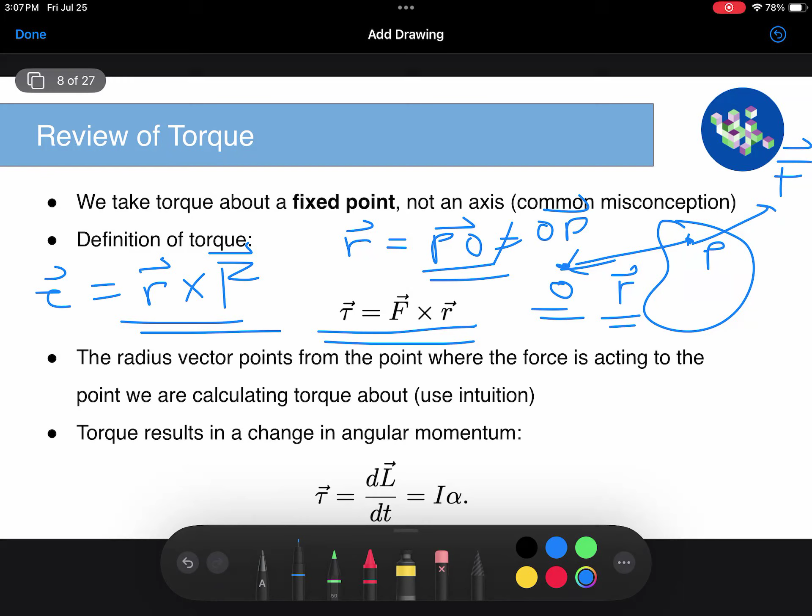Are these two equivalent? In a way, yes, and in a way, no. They both are supposed to mean the same thing. What is different between these two definitions is the definition of the radius vector. You'll use this definition if R equals OP, but you'll use this other one if R equals PO. So how do I really memorize that?

Well, think about it this way. So if I have a disk, and let's say it's three-dimensional, let me clear the board up a bit so it'll be easier to see.

All right, so let me draw in red. If you have a disk over here, this is our disk, and this is our rotational axis. And it's going to be rotating, say, in that direction. So if you look from the top, it's rotating counterclockwise.

Now if my force points, say I apply a force in that direction to the right, that's my force. Now torque is like dL/dt, which is like I times alpha. If you're applying a force in that direction, you're causing an angular acceleration that points in the upward direction. Basically that force is making the disc rotate in that direction, making it rotate counterclockwise.

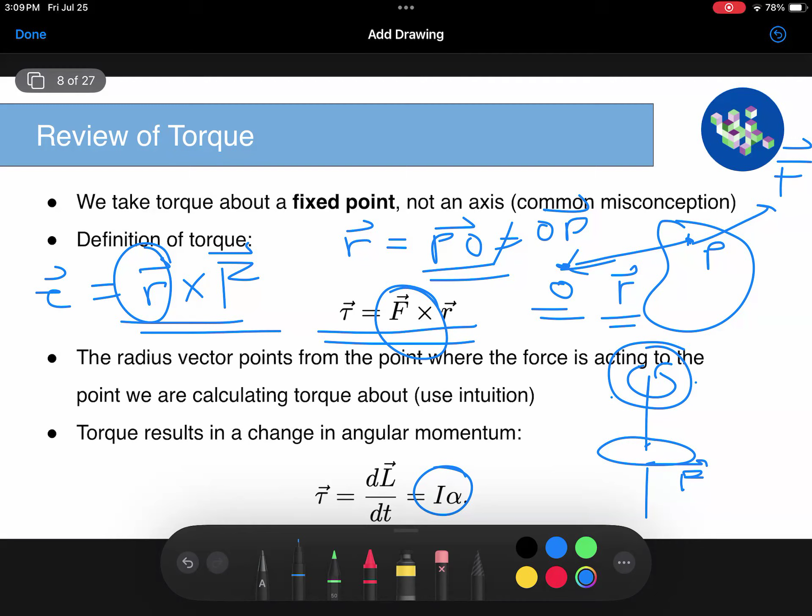And if you remember, if you want to find the direction using cross products, you use the right-hand rule. You take your fingers, second to fifth fingers, and point them in the direction of the F vector. Well, if we're using this definition, you point your fingers in the direction of the F vector. In this case it's pointing to the right. And then I want to curl my fingers in the direction of the R vector.

Someone tell me what the R vector is in this case. Nirvair, can you tell me, or can you draw on the board where the R vector is when I'm doing F cross R?

Isn't it pointing upwards? Wait, can you draw on the board? I don't know how, sorry. Wait, do you see on your bottom left corner of the screen, is there like a little green pencil? No. Oh, okay, that's all right. Well, oh, you guys can't draw. Yeah, I don't really see any setting to let you guys draw, but all right.

Basically, we want the cross product to point in this direction, we want this to be our F cross R, the upwards direction. So if we know that F is towards the right, what direction do we want the R vector to be? Remember, for the right-hand rule, yeah, towards the middle.

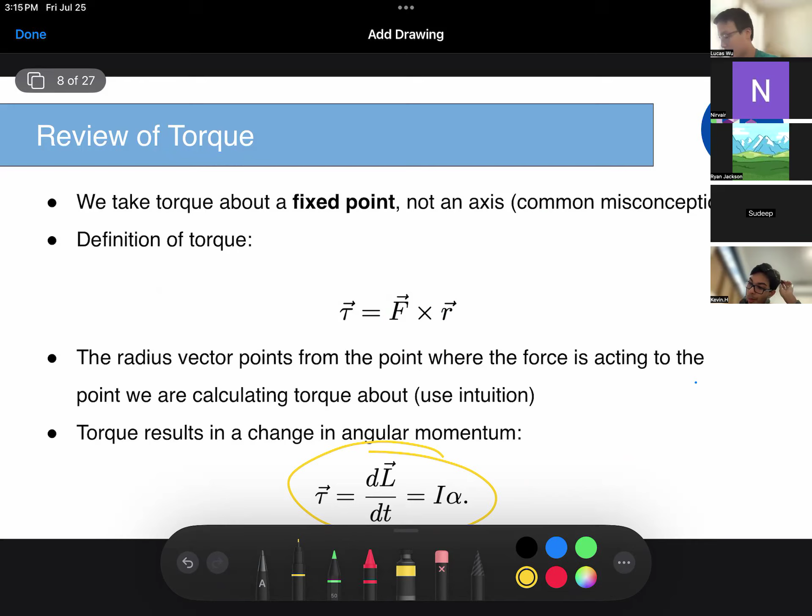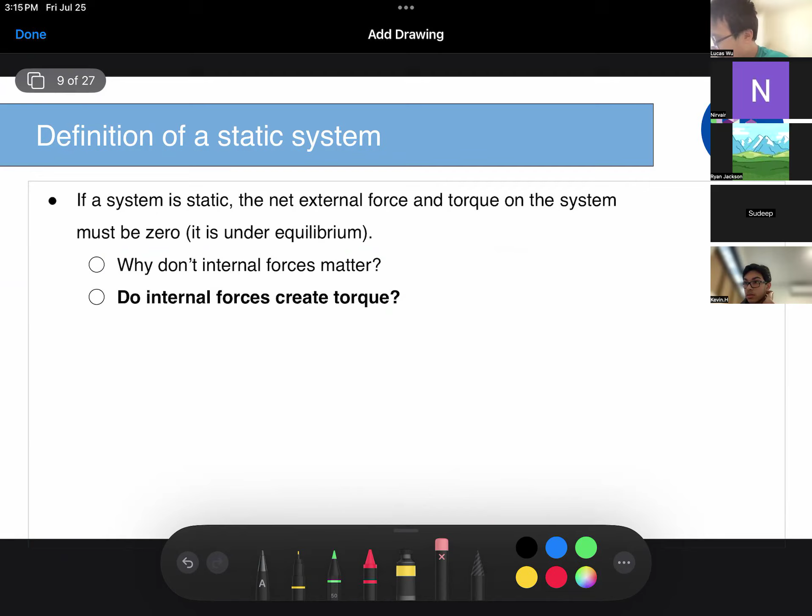So you'll be fine for this week. Let's go on to the next slide. Definition of a static system. If a system is static, the net external force and torque on the system must be zero, so it's under equilibrium. So if I translate this into mathematical terms, for the net external force to be equal to zero, what that means is if I'm summing all of the forces, the vector sum of all the forces must equal zero. And the net torque on the system must be equal to zero.

So that's just doing this sigma of Fi crosses the Ri. And remember, Ri is the radius vector from the point the force acts to the point you're taking the torque about. And the point you're taking the torque about, or that fixed point, you can choose any point in space to do the torque about. It doesn't really matter which point you do it about.

For the system to be static, this must be equal to zero. We'll see later that it doesn't matter which point you're taking the torque about. If you have a static system, it wouldn't matter which point you're taking the torque about - it would always be equal to zero. We'll show a proof of that later, but for now, just remember: system is static, net external force and torque on the system is equal to zero.

Now here's a question for you guys. Why don't internal forces matter? You might have heard of the terms external and internal forces. For example, if you have a block, and a massless string, and there's an external force pulling that string. The external forces on this: gravity downward, a normal force upwards, and the force you're pulling with - assuming there's no friction, those are the three external forces. But there are also internal forces.

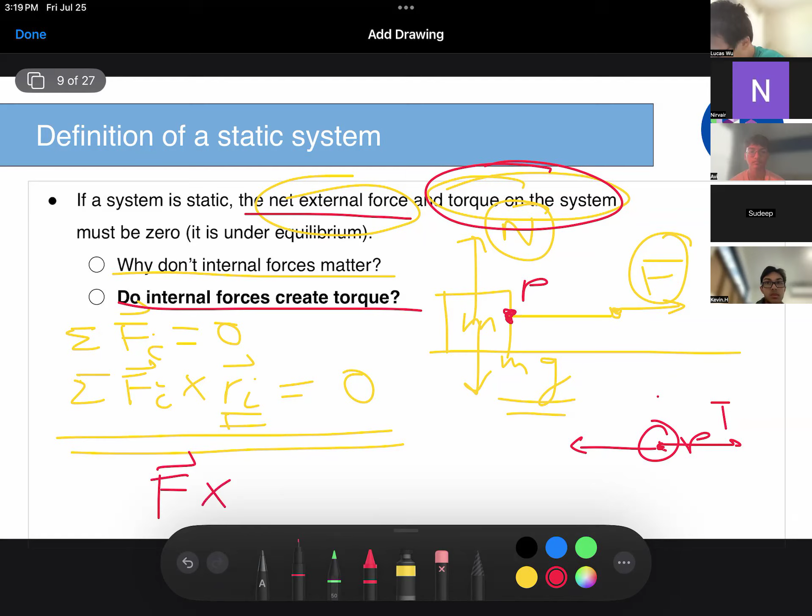That's actually the second question: do internal forces create torque? You guys probably can answer this. We'll assume that if you have two internal forces, they're force pairs acting at the same point. So what we're doing is F crossed with some radius vector, and F crossed with the same radius vector - that's just equal to zero. So internal forces create no torque - the answer is no. The net external force is the same as saying the net external and net internal force, because the net internal force is always equal to zero.

So just remember that if a system is static, net external force and torque on the system must be zero. Do you guys have any questions on that? Nope. All right, let's go on.

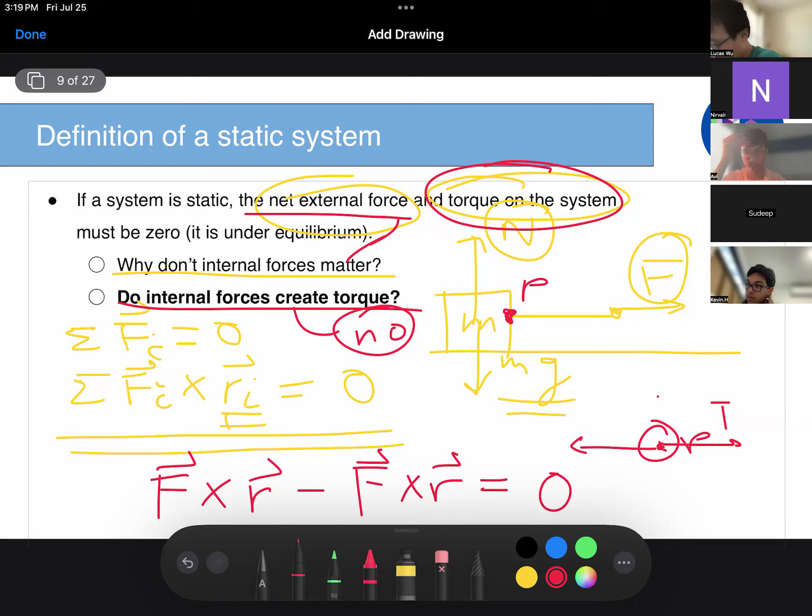Let's talk about the bending moment - some people call it that. Essentially, we need to prove that given the net force on the system is zero, if the torque about a single point is zero, then the torque about any point is zero. Let me give you guys a minute to think about this. If you have an idea or an answer, message me in the chat and I'll tell you if it's right or wrong - it's probably right, but we'll go over this in a minute.

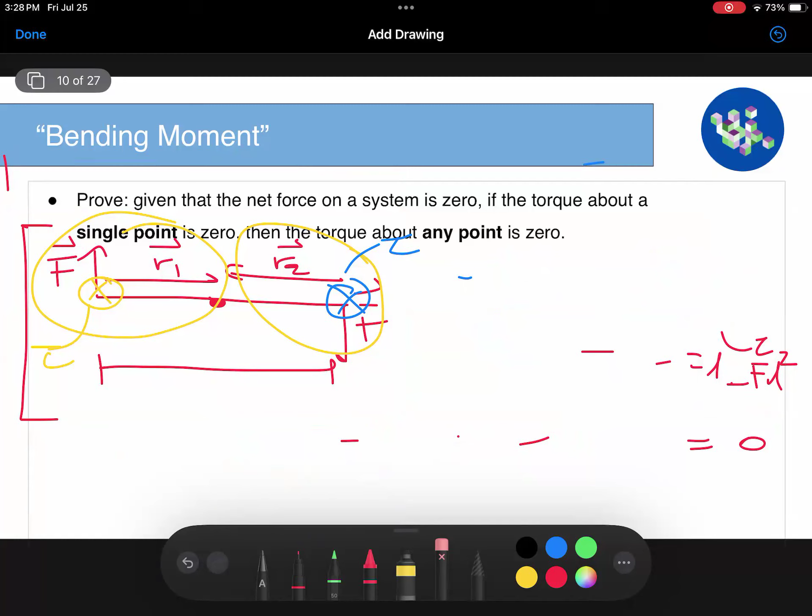All right, okay, so let's go on to prove: given that the net force on the system is 0, and the torque about a single point is 0, then the torque about any point is 0.

I remember someone had a pretty good explanation about it. Avi, can you give us your explanation, your proof of it?

Okay, so basically what I did was that, like, if the torque about one point is zero, and let's say the object is rotating or doing whatever, it's just going to stay however it's rotating by Newton's first law, like Newton's first angular law. And then by that logic, since the state of rotation is not changing, that means if you try to take the torque about any point, you're still going to get zero because the angular acceleration is zero.

Yeah, I like that. So you're using the fact that torque equals moment of inertia times angular acceleration. You know the torque about some point is zero, so your angular acceleration is zero. Then the torque about any point must also be zero, because the angular acceleration is independent of whatever point you're taking the torque about, right?

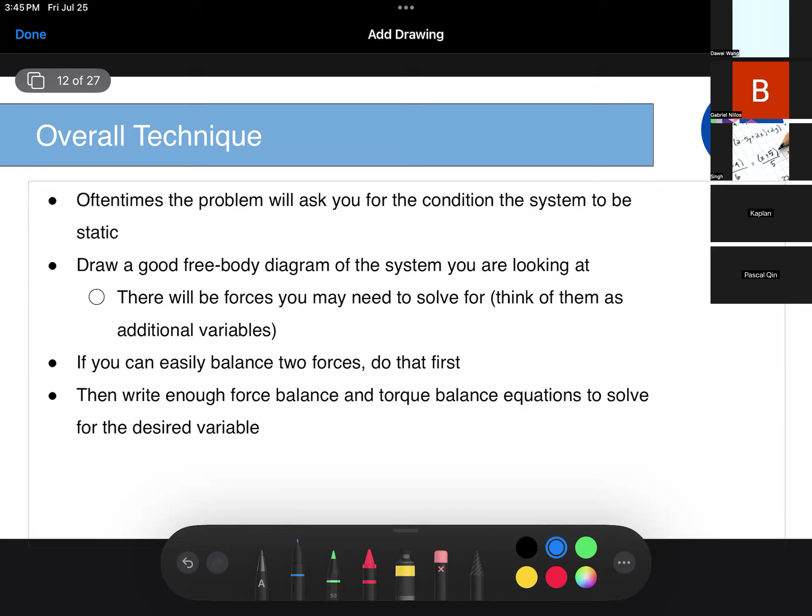Oftentimes the problem will ask you for the condition for the system to be static. First, draw a good free body diagram of the system you're looking at. There might be forces needed to solve for, think of them as variables. If you can easily balance two forces, do that first, and write enough force balance and torque balance equations to solve for the variables. You can read this, but you don't have to memorize it. You'll acquire it through technique. That's why I'm going through it so fast. Once we start this next problem, you'll get a better idea.

Just a few tricks: use your intuition, don't solve for every force, do some sanity checks. It's helpful to take torque about a point that many forces act upon. But these are just techniques, don't memorize them. Once we do the next problem, you'll get a better idea and acquire better intuition when doing more statics problems.

So let's do this one together since it's probably the first problem we're doing together. A ladder leans against a frictionless wall. If the coefficient of friction with the ground is mu, what is the smallest angle the ladder can make with the ground and not slip? Let's draw a picture and a good free body diagram.

That's our wall and that's the ground. Let's say that is the ladder. What's the smallest angle the ladder can make with the ground? Let's call this angle theta. Let's say we're given that there's friction with the ground, so we're given mu, the mass of the ladder, and the length of the ladder, which is L. Now let's draw a free body diagram. How about someone tell me what the forces on the rod will be?

Friction, normal, and gravity. Good job.

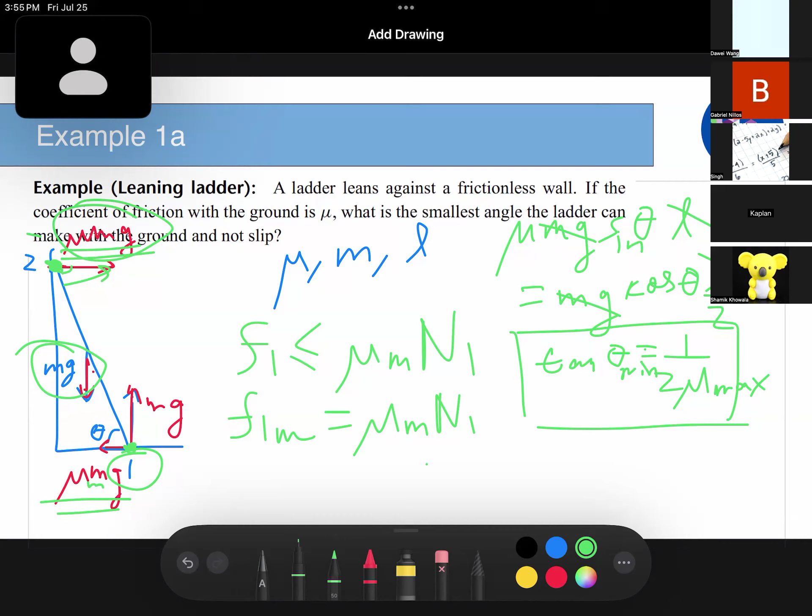Wait, why do you label the coefficient max? Oh yeah, remember that friction force? This is a static situation. Remember, if you have static friction, your friction force is always less than or equal to the maximum mu times the normal force. Remember that?

I thought the maximum was just mu n. Yeah, you can call that mu, sure, it's the same thing. But the friction force, yeah, I get what you're saying. So it's always less than or equal to mu n. I guess we can erase that. The friction force in a static situation is less than or equal to the maximum static friction times the normal force, right?

And from that, we get the condition for the minimal angle with the ground. Any other questions? Or if not, let me ask you a follow-up question. What if I didn't want to find the minimal angle with the ground, but just wanted the condition for the angle with the ground so that the stick does not slip?

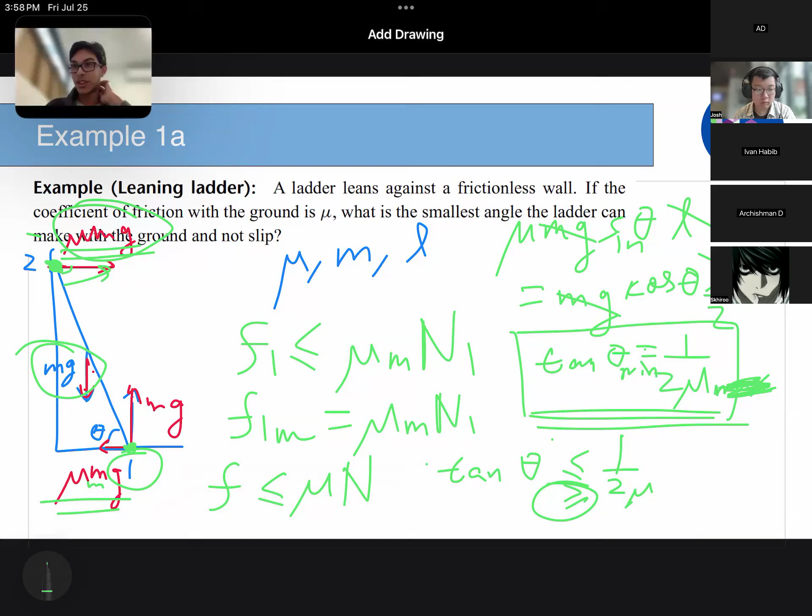Yeah, I get intuitively why the smaller the angle, the more it'll slip, but is there an actual physical reason why that's the case? I was thinking it was something to do with the torque, but I have no clue.

No, that's good. So if we look back over here, this equation was balancing the torques. The thing that makes the ladder slip is due to gravity. If we look at this, the torque due to gravity is mg cosine theta times L over 2. The smaller the angle with the ground, the greater cosine theta is, and the greater cosine theta is, the greater mu you need to balance the torque due to gravity.

So yes, you have the intuitive explanation, and this is the algebraic explanation: cosine theta increases as theta decreases. So as the angle with the ground decreases, there's a greater torque created by gravity that needs to be balanced by the friction force. Does that make sense? I like how you're asking for the algebraic way. Yeah, that made sense. I like those questions. Any other questions?

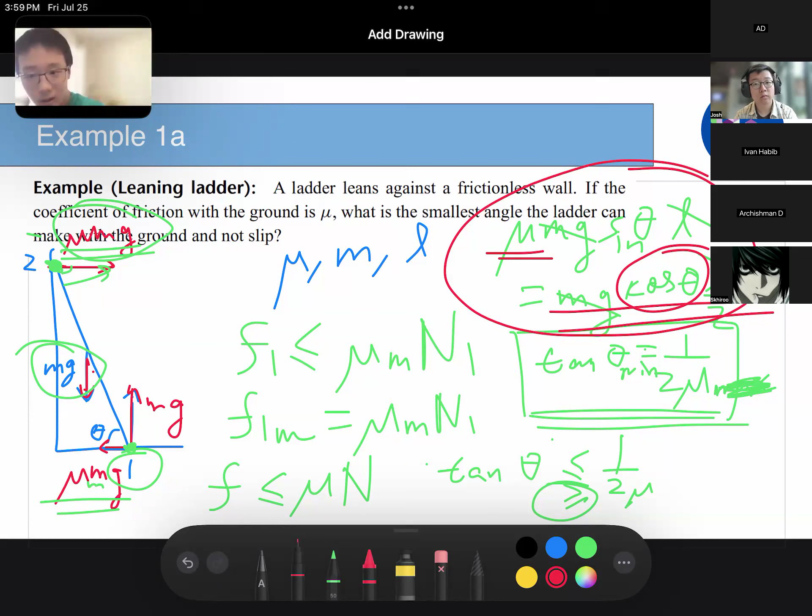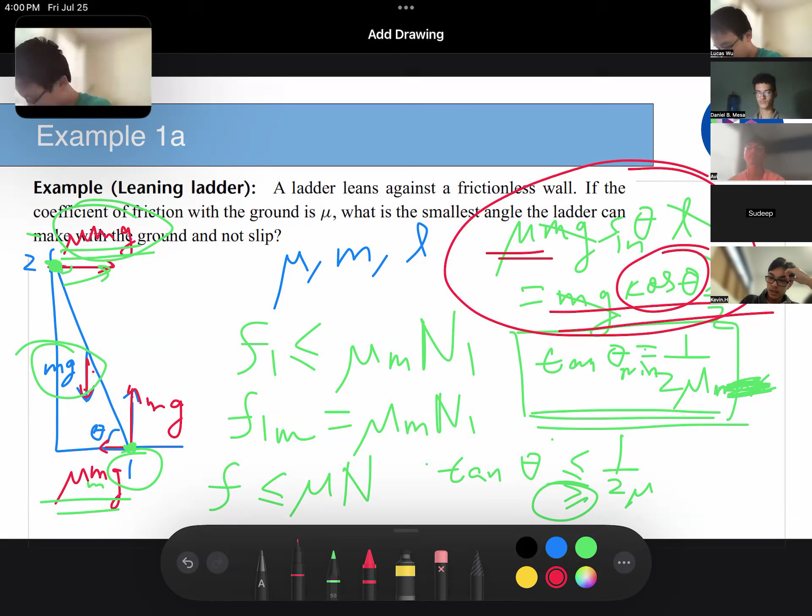Let me see. All right, I don't think there are any other questions, so let's go on. Oh, we're running low on time. That's not good. All right.

Here's an idea: if forces are applied to 3 points in a static system, then the extensions of the vectors representing the net force at each of the 3 points must be concurrent or parallel. We want a proof for this.

For the sake of time, I'll just go over the proof. So essentially, what are we saying? If we have a static system, for example, this, and then maybe this is one force, and then we might have another force over here, and then another force maybe pointing in this direction, like this.

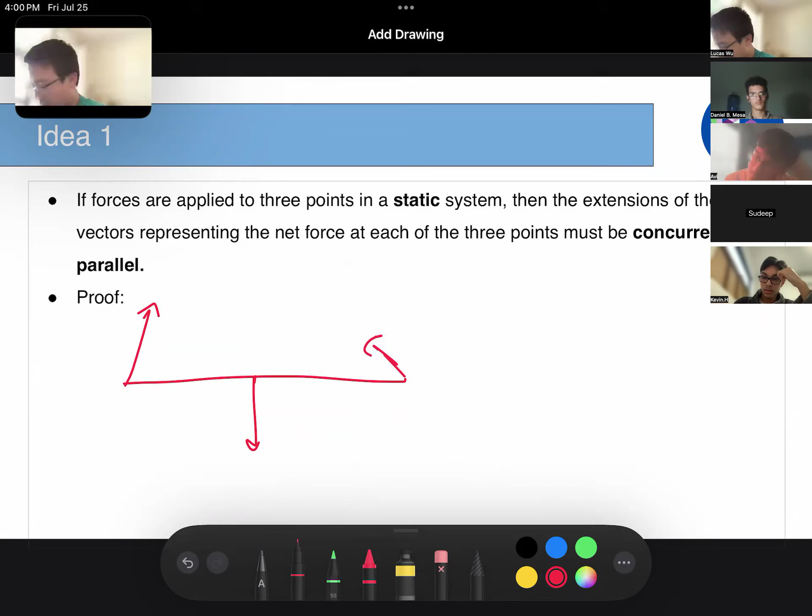Now, what it's saying is that if I draw the extensions of all these forces — we're first given that there's force balance, so these 3 forces, if I do their vector sum, they equal 0. Now, the theorem is saying that if I draw the extensions of each of these vectors, extend this, extend this, they must all meet at one point for there to be torque balance, basically.

And why is that so? We're given that sigma f equals 0. And then we know it's a static system, so sigma tau is also equal to 0.

Remember when we proved that sigma f was equal to 0 and sigma tau was equal to 0, basically when it was a static situation, it doesn't matter which point you're taking the torque about, the torque about that point has to be equal to 0.

And then if these 3 vectors, or the extensions of these vectors, all meet at this one point over here, let me draw that in blue. Notice that the torque about that point has to be 0. And why is that so?

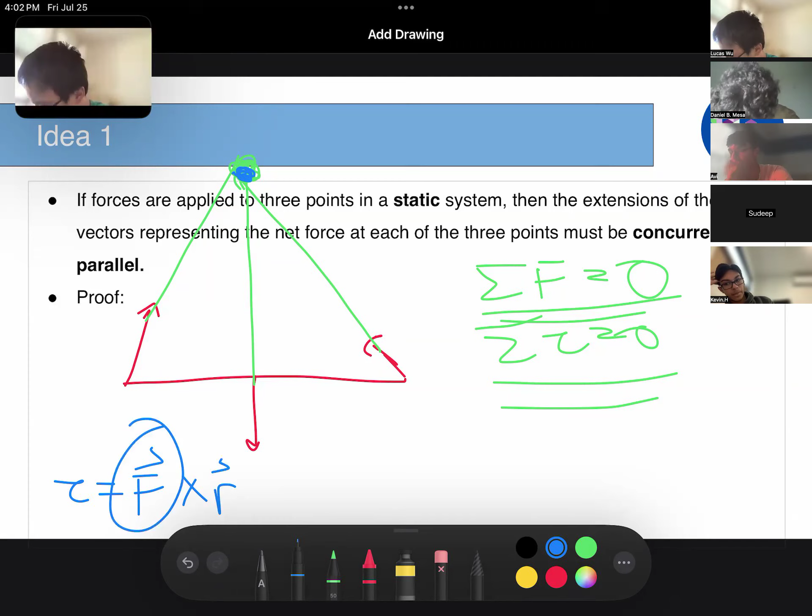Well, remember, torque equals force cross r. Your force here, they're in the direction of r — they're just scaled versions of the radius vector. Because if this is f1 vector, then the r1 vector would be over here, in this direction. This is f2, and this is R2. And so on for R3, F3 and R3.

Remember, here we're doing the cross product between parallel vectors — F and R are parallel here. And if you're doing the cross product between any two parallel vectors, it's always equal to 0. If you remember back in the vector cross product days, it's equal to 0. So this will equal to 0.

And we know that they're concurrent, so if they're concurrent, the torque will equal 0. And because we know the torque about that point is equal to 0, since we also have force balance, then the torque about any point must also equal 0.

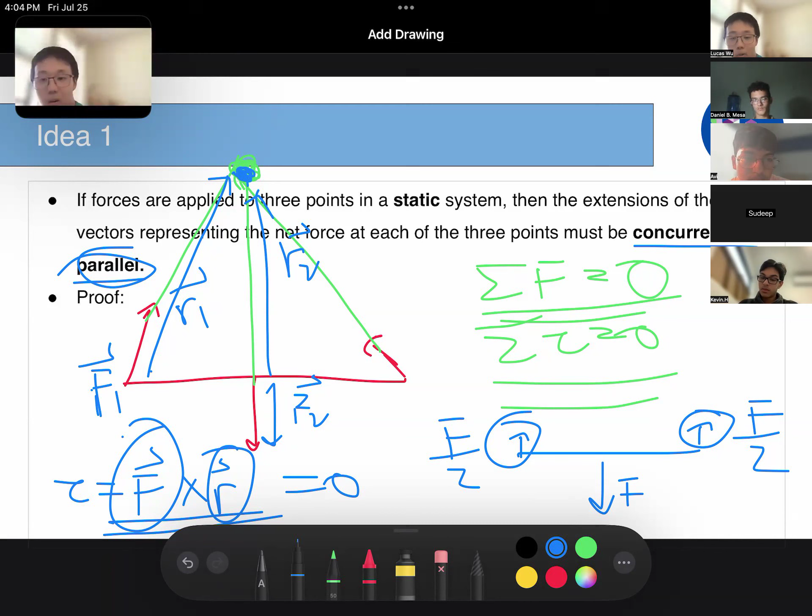Does that make sense to everyone? Any questions about this? All right, okay, let's move on then.

Actually, I'll let you guys think about this for homework. First, basically, if we have forces acting at 2 points, what can we conclude? And also, if we have forces acting on more than 3 points, must the extensions of the net force vectors be concurrent or parallel? Think about that for homework.

But let's go back to this problem, and we'll solve it using the previous idea. Let me draw the diagram again. And if anyone has an idea on how to do this problem, you're welcome to tell me, and then you can lead the way.

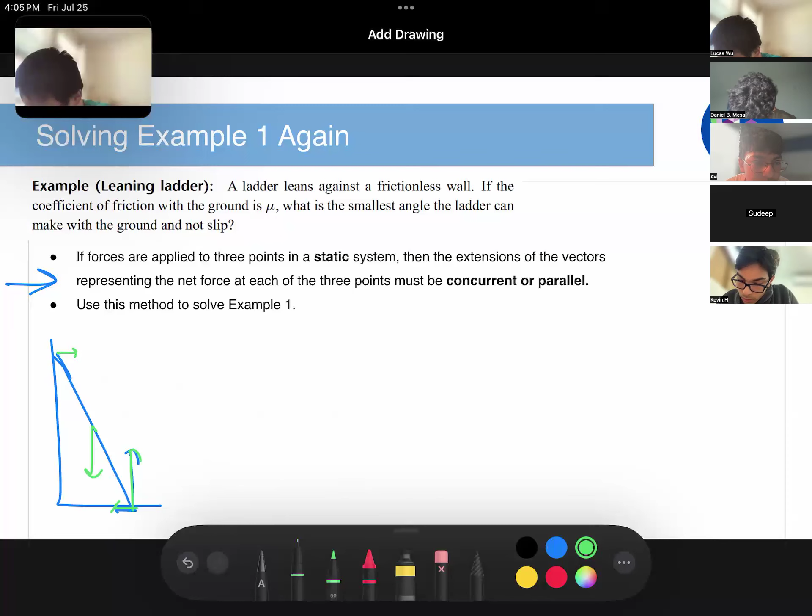So these are our forces, remember? We found that this was gravity. This is normal force. And after a bit of doing the force balance — oh shoot, let me draw this a bit more accurately. So this will be the normal force, this is gravity force, this is normal force, this is friction. So we got this was mg, this was also mg, this is mu mg, and this is also mu mg.

How do we use the idea that there are forces applied to 3 points? Here we have 3 points where the forces are applied: 1 point here, 1 point here, 1 point here. If we have these 3 points where forces are applied, we know that the extensions of the vectors representing the net force at each of the 3 points must be concurrent or parallel.

So what is this saying? We're saying that if we draw this extension, draw this extension, and then look at the net force at this point, doing the sum of the friction force and the normal force, they should all meet up at this one point over here.

How do I use that to solve for the minimal theta over here? Anyone have any ideas? I'll give you guys maybe a minute to think about it.

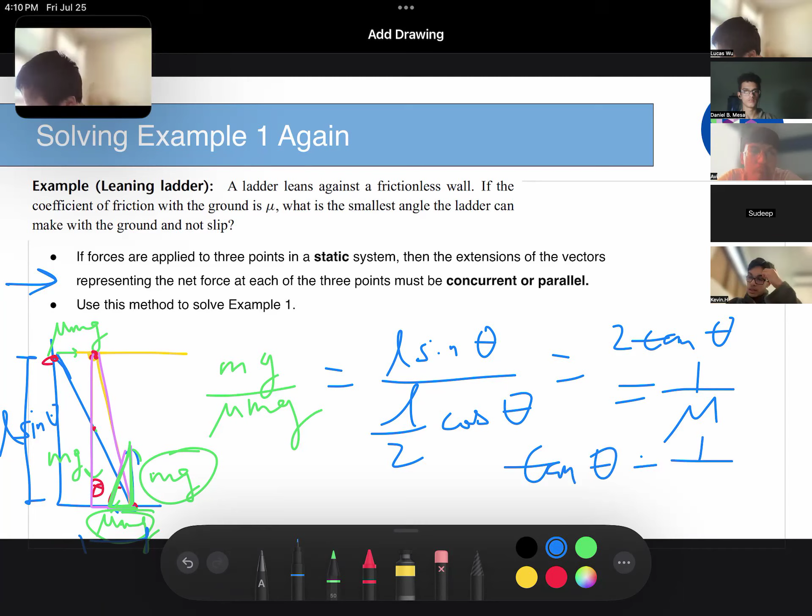Isn't that pretty cool? So we can solve the problem without having to write a torque equation - we're just doing geometry here. We found the similar triangles and proved that those lines have to be concurrent, they have to meet at that point. So this must be true, and you'll end up with tan theta equals 1 over 2 mu as before.

Any questions about that? If you're not really good at the geometry, that's fine, because this is physics, but make sure you have a good idea of what's going on. Any questions about that?

Let me see - just to clarify, what is L? Oh, L is just the length of the ladder. So I'm saying that this length over here, this is the ladder - the length of the ladder must be L.

Yeah, here's another question. For practicing, is the competitive physics book you sent good? Yeah, it's pretty good.

All right, okay, next slide then, I guess. Think about this following problem - maybe it will be for homework. A ladder, so it's the same problem essentially, except this time you still have the normal force, the friction force, gravity force here, and you have the normal force here, N2. But what happens if you also have...

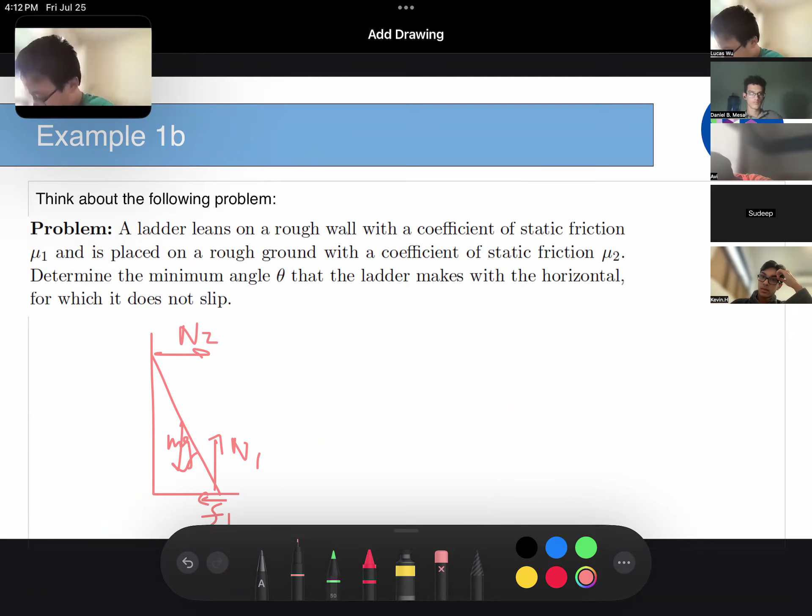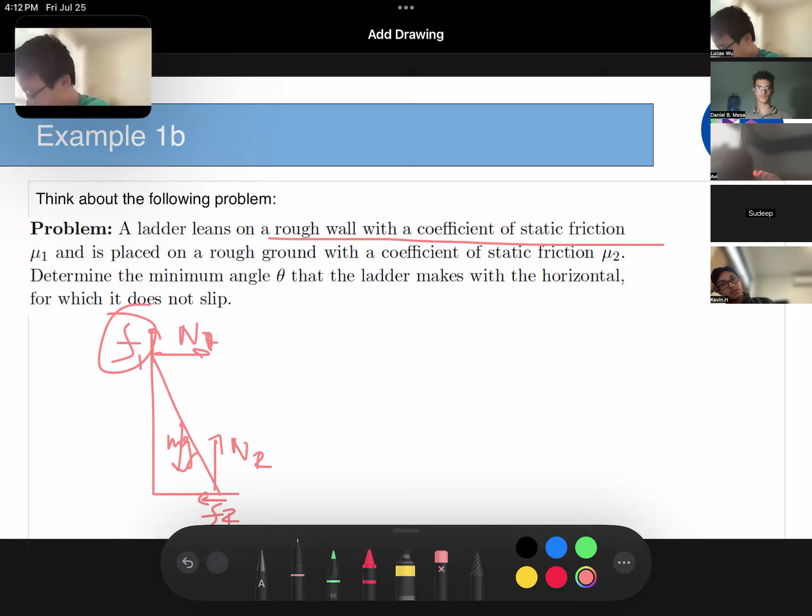Oh shoot, let's say - oh wait, I'll have to rename this. So this is N2, this is friction 2. This time I also have friction with the wall. Remember last time we didn't have this friction force over here, but this time the rough wall does have friction. Before we said the rough wall didn't have friction, it was only the ground. Now the rough wall also has friction. How do you solve this problem? I'll probably give it to you guys as homework, but think about this - it's pretty interesting. You can solve it using the previous idea that the forces have to be concurrent.

We'll skip over that problem for now.

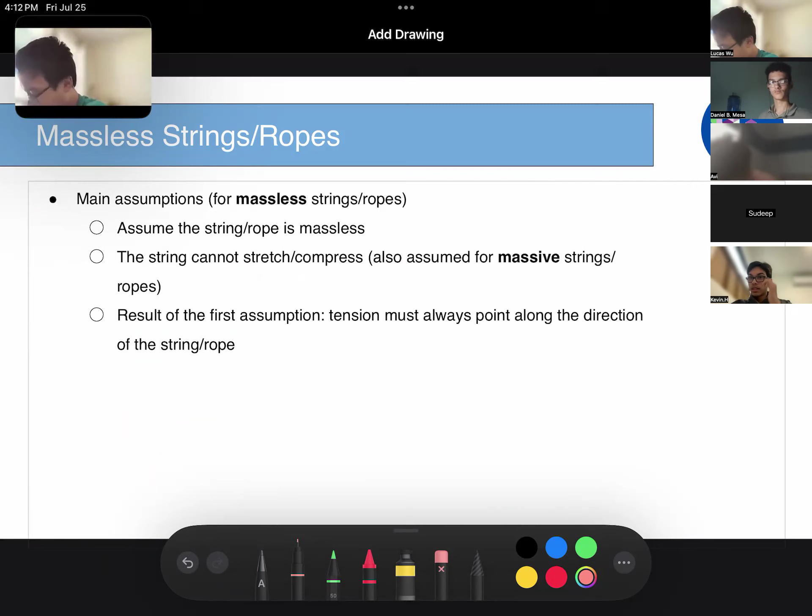Let's talk a bit about massless strings and ropes. Main assumptions: assume the string or rope is massless, and the string cannot stretch or compress. Tension must always point along the direction of the string or rope.

Why is this so? Well, the string is massless, so consider it as many infinitesimal segments, like this. If I'm looking at this one over here, it will have a tension this way and a tension that way.

Wait, first off, it's massless, so we know it has to be under force balance, because F equals ma. First of all, it's static, so the force has to equal 0. Even if it wasn't static, like if the rope was accelerating, your net force still has to equal 0, because your mass is equal to 0. If your force is not equal to 0, we're saying force equals 0 times acceleration. If your force is not equal to 0, then your acceleration will be infinity. So if you have a force acting on a massless object, you'll have infinite acceleration, which cannot happen. So the segments on the rope have to be under force balance.

Now, why must the tension always point along the direction of the string or rope? Well, let's go back to this drawing over here, this one.

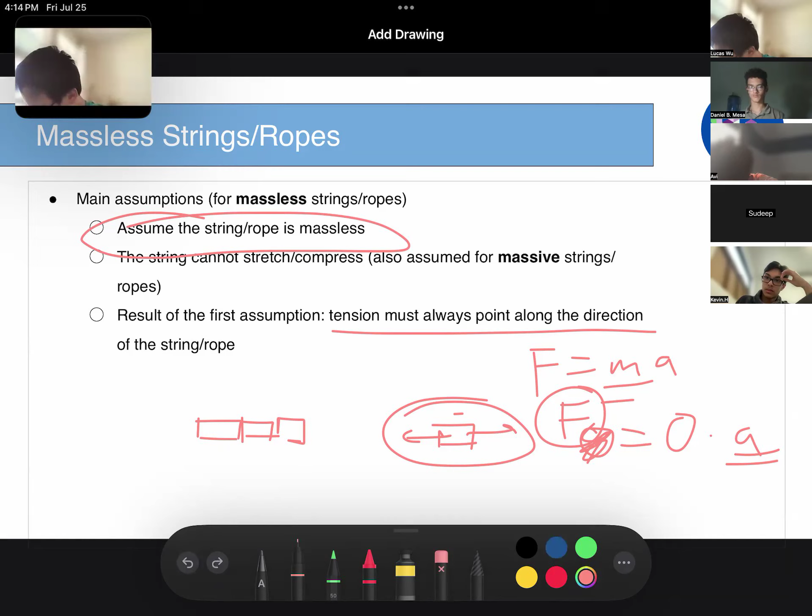If I had, for example, the tension pointed this way, first off, for there to be force balance, the tension on that side would have to point this way. But that would necessarily mean that the tension points that way on the other segment, which is not possible, because we know these two forces must be action-reaction pairs — they must be equal and opposite. If the tension was not pointing along the direction of the rope, these two would not be force pairs, which violates physical laws. So we know tension must always point along the direction of the string or rope.

Basically, the tension must always point along the direction of the rope. Yeah, those are just some assumptions.

Let's go on to this problem. A massless rope is wrapped around a rough pulley with a coefficient of friction mu. The segment of rope in contact with the pulley subtends an angle of phi. If one end of the rope is vertically attached to a weight of mass m, what's the minimum force F that has to be exerted at the other end for the rope and the mass to remain static?

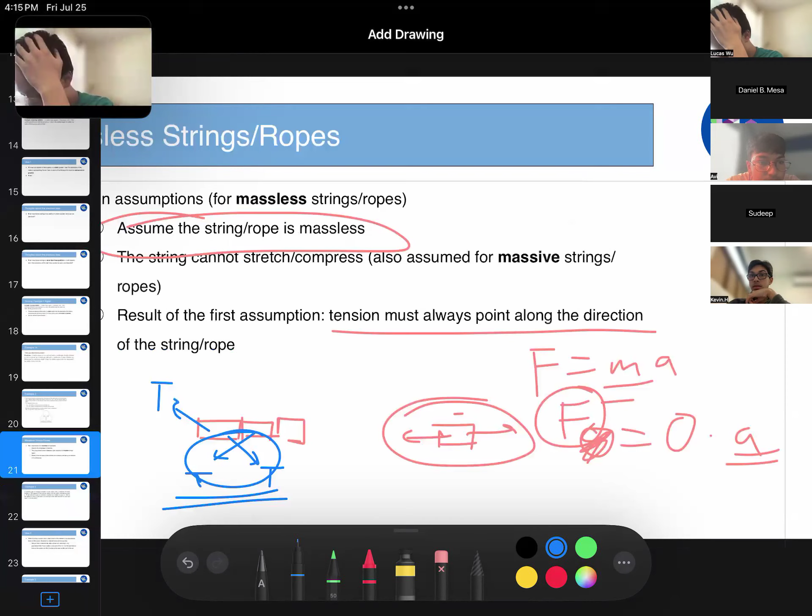We're basically out of time now, so hold on. Sorry, all right, how about let's go back to the previous one because there's a question on it. Then maybe I'll give you guys this problem for homework, because we're basically out of time. How did you know these?

Wait, the question is, how do we know the purple triangle and the green triangle are similar? Well, the answer is that we drew this line over here. This line has the same slope as this line over here — well, it's negative, so let me draw a better diagram. We have mu mg over here, and we have mg over here. We want to prove that this one over here is similar to this one over here.

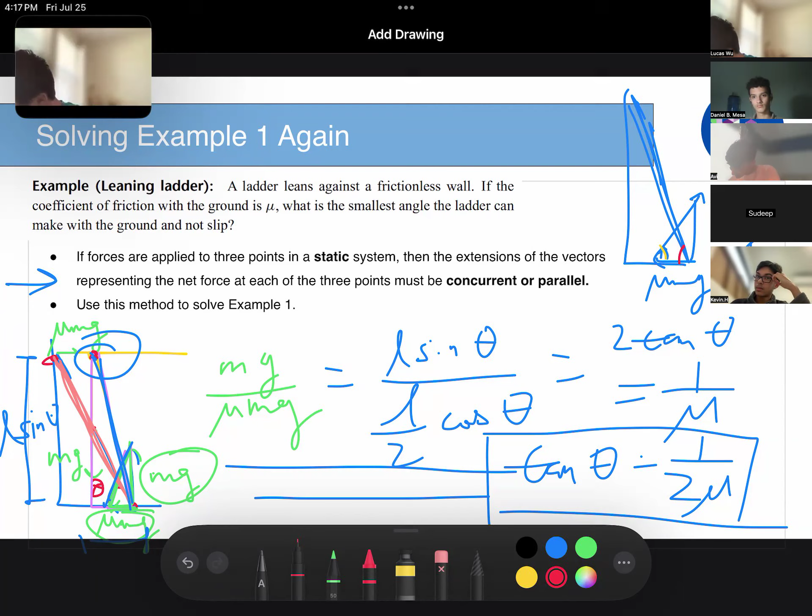Basically, it's just that this angle over here — it's a bit hard to draw — this angle must equal this angle, which should equal this angle. You also know these are both right triangles. So we know two of the angles are equal, and the third angle must also be equal. That's just AAA similarity. Does that make sense?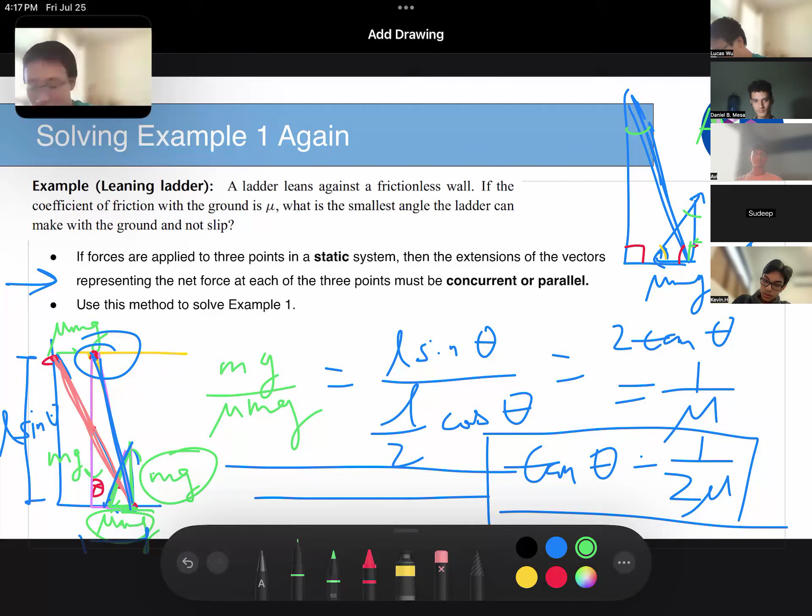All right, but anyways, if we go back to the problem over here, let me just draw a quick diagram for you guys and you can think about it. We have a rough pulley and then a massless rope wrapped around it. So it looks like this.

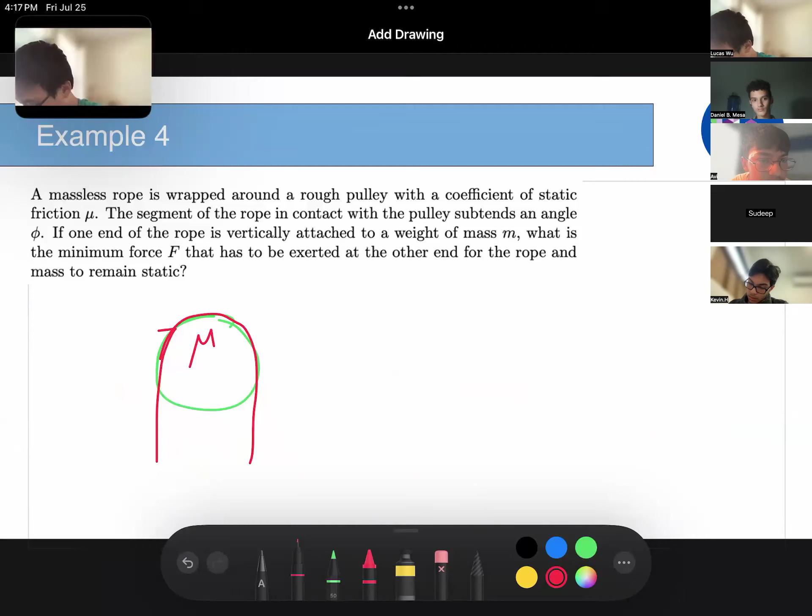The pulley has a coefficient of friction mu. Let's say this angle over here is phi. And one end of the rope has a mass with weight m. What's the minimum force F that has to be over there? So how would I do this problem?

Well, you know that this force over here is mg, so the tension at this point, T, would equal mg, right?

Now, if I examine an infinitesimal angle of the pulley, let's say this is some d theta. I have a tension over here, and also a tension over here. But there's also going to be a frictional force, let's say in this direction. There will be some frictional force, and you want to find this frictional force, and find this will be T prime.

You want to balance T prime, T, and F. Basically you want to find T prime given your T and your F. That's basically how you solve this problem.

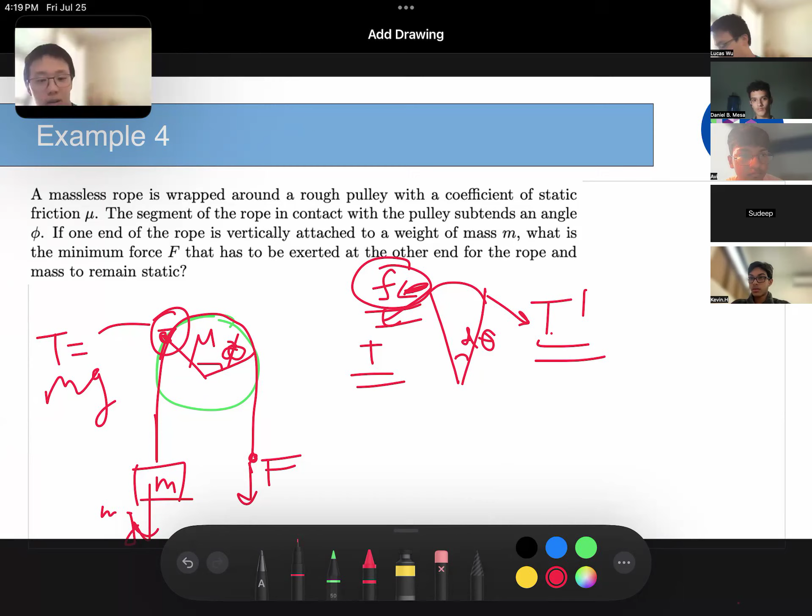Yeah, so that's how you solve the problem. I'll let you guys think about it for homework, but... why is the friction force in the same sense as the tension? Oh, why is friction force in the same direction as tension?

Good question. So we can say that basically we know the normal force is in this direction, right? This is our normal force. Yeah, if that's your normal force... wait, that's a very good question. So let me erase some stuff.

All right, so let's draw the forces a bit better. You have a tension force here, another tension force here, and because they all have an inward component, that's your normal force. It's probably not going to be that big. So this is your normal force. Actually, you're right. So the friction force would point... it will point in the horizontal direction, I think. So that way, that's your friction force.

Well, really, it doesn't matter which direction you write it, because if I'm looking at the projection onto the rope direction, that'll be like, for example, if I drew my friction force as this, you're right, I'd actually be wrong. So yeah, you're right, I should have drawn it a bit better. It would be in the horizontal direction. That would be what F will be. Yeah, good correction, F would be in the horizontal direction. Wait, good catch. All right.

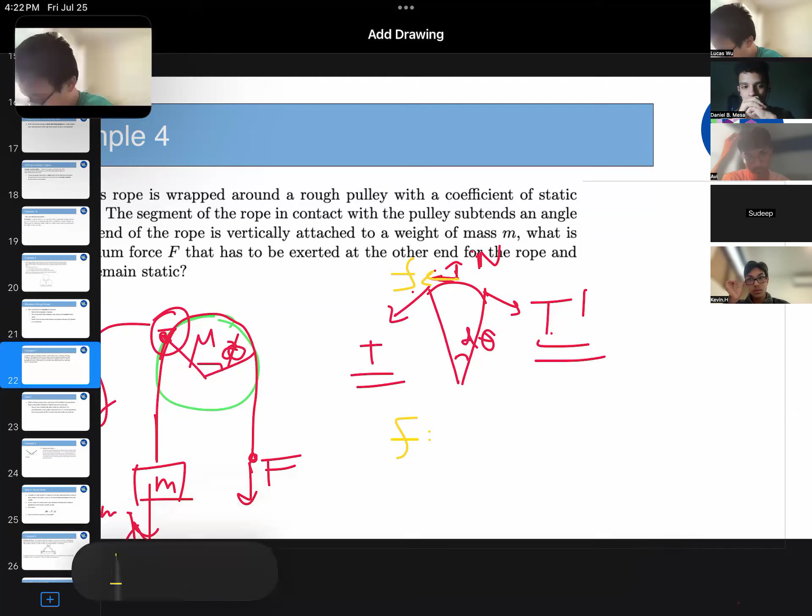Oh yeah, what's up? Oh, wouldn't the F help pull it up so you can minimize the force you're bringing down with? Oh yeah, well, sorry, yeah, F should be towards the right. Yeah, that's my bad. Okay, so F points towards the right. If we're looking at it this way, then F would point towards the right, so the tension would be decreasing.

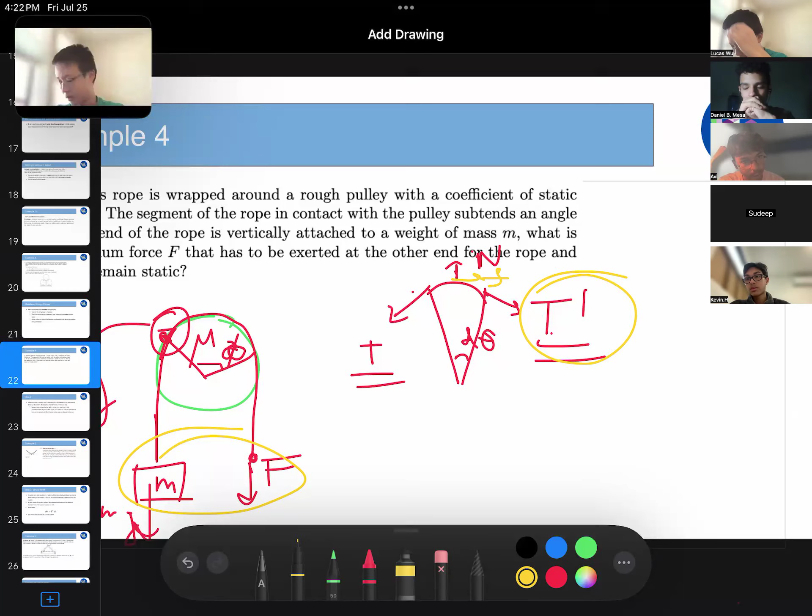All right, let's quickly go over the next idea, and then I'll let you guys think about this other problem, and then I'll let you go, because we're basically going over now. But when you're choosing a system, keep a clear picture of the internal forces and the external forces on the system. Balance the external forces and torques only.

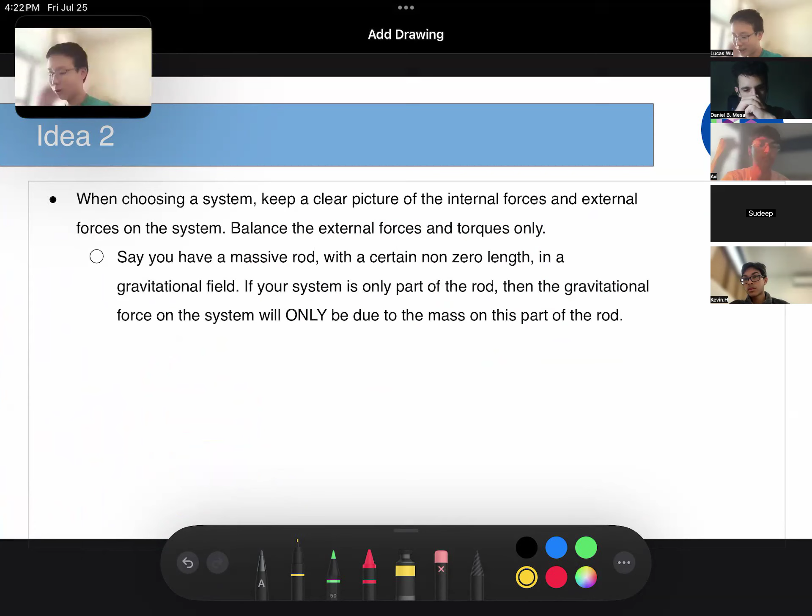Here's an example: a rope rests on two platforms that are both inclined at an angle theta. The rope has a uniform mass density, so here we have a massive rope, not massless. The coefficient of friction between it and the platforms is 1, and the system has left-right symmetry. What's the largest possible fraction of the rope that does not touch the platforms? What angle theta allows this maximum fraction?

Then if I'm looking at the external forces on this, one external force will be gravity, but that gravity force will not be the entire gravitational force on the rope, right?

It'll only be due to the mass of this portion of the rope. So it's equal to m of this section, not m total. It will just be the m of this section times g. And then the other two forces—can someone tell me what are the other forces on this system, if I'm choosing my system to be the portion of rope that's not on the platform?

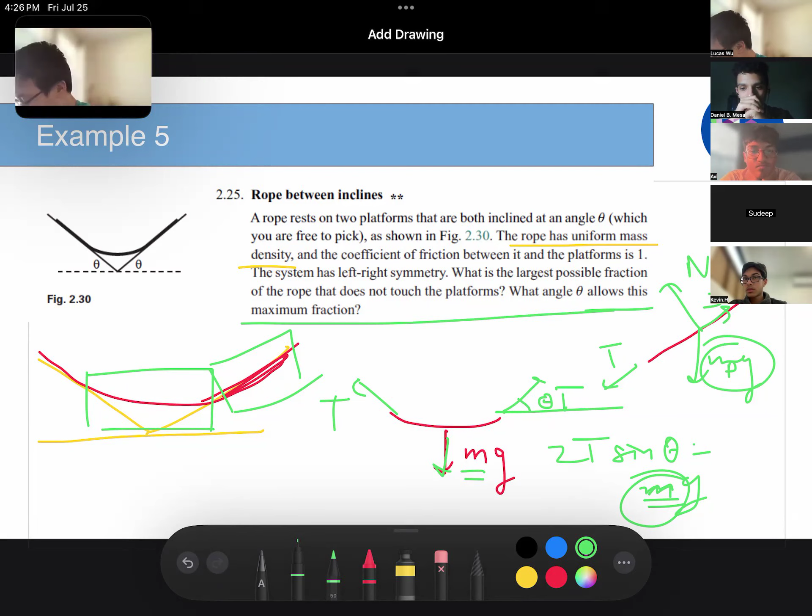To solve this problem, this m—by the way, this is the m on the platform—it's not equal to this m over here. So this problem, which I'll give you for homework, the idea to take away is just to choose different systems and you can solve for different variables. Choose your systems wisely, and eventually you'll be able to solve for the angle theta that allows the maximum fraction.

Any questions about that? Wait, one question in general.

When you solve problems out of this book, do you look at the solutions if you get stuck, or just keep grinding? Take a peek at the solution and then try to work on it a bit more. And if you're really, really stuck—if you spend two hours on the problem and you're still stuck—just look at the solution, I think.